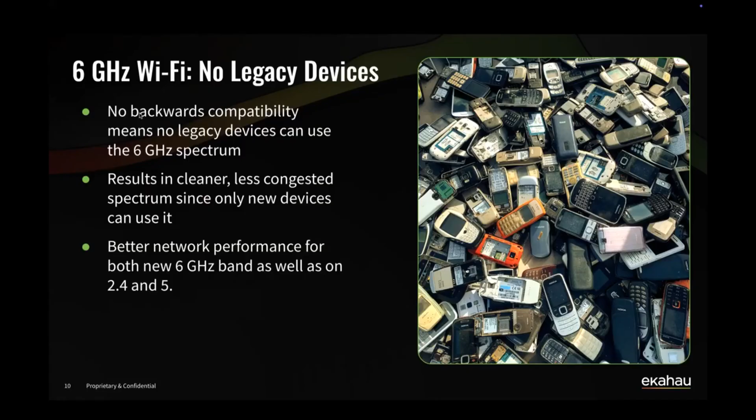When you look at enhanced security for 6 gigahertz, this comes into the design when you're looking at office spaces, stadiums, airports, or cruise ships, and understanding the complexity of this now. The majority of today's devices, your iPhones and Samsung phones, anything made in the last 5 years or so, is going to have at least some WPA3 compatibility in it.

Mostly from a software upgrade, but at least you can use WPA3 on 5 gigahertz, which gets you ready. But if you've got a 6 gigahertz device, you're going to be ready with that.

I'm not going to go into the transitioning aspect of it today, because we did a whole other webinar on that. It takes a bit more of a thought process, right? Because if you're going from 5 gigahertz to 6, think of it like the old days of going from WPA to WPA2. We had a challenge there, and now we're running into that same thing with WPA3 and 6 gigahertz.

So 6 gigahertz offers us enhanced open, better authentication, and of course OWE support, and WPA3, which gives us better management — management frames are mandatory, and the encryption level is a lot stronger. WPA2 is breakable today, WPA3 is less so. I'm sure about 10 years down the road, someone's going to have a supercomputer that'll be able to break that at some point.

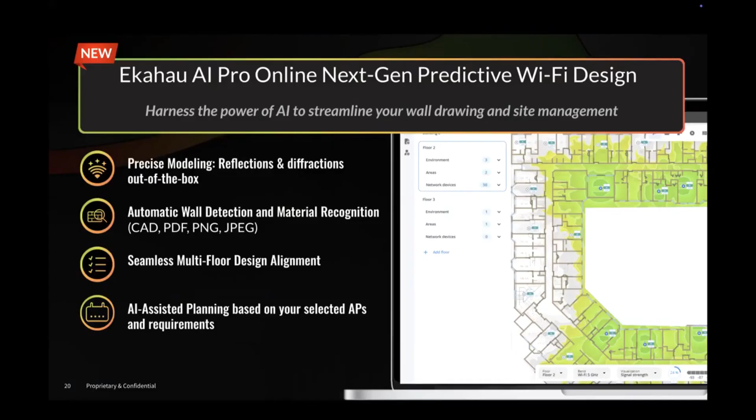All right, so let's get into some demos here. I'm going to pause for 2 seconds, and then go into demo mode and show you what it looks like from an accurate kind of design phase. What does that look like when we're designing? We have a couple of tools here, and I'm going to show you one of them, if I can get this over on the correct screen for you.

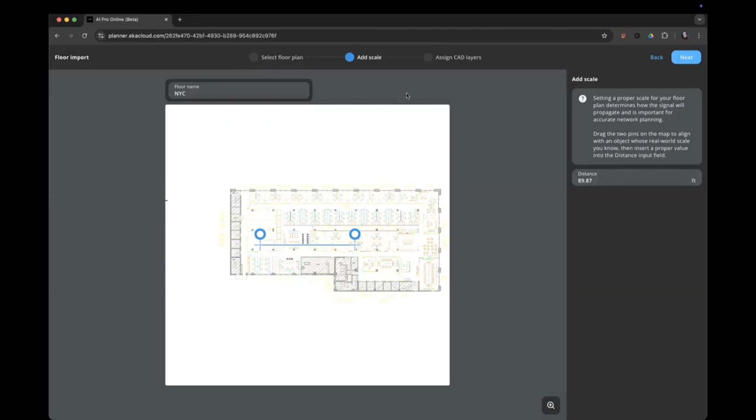In this case, I'm going to start a little more greenfield here. I'll talk about greenfield, and I'll talk about an existing design as well. From a floor plan perspective, what's cool is that we can grab any type of PNG, JPEG, or even an AutoCAD file. I like AutoCAD files because I can access the layers that are already embedded, so now I'm going to open up that CAD file.

It's going to assign the layers here. And once it assigns the layers, it's going to tell me, hey, okay, now you have this many types of walls, this is the attenuation of it, and this is where they are. Then you can go ahead and let that apply. So that's going to come up here in just a second. Of course, my password might have timed out since I left it open, but we'll see what's happening here.

Now we'll let that kick in. And I love it when the world of live demos works. Oh, there it is. Okay, I'm paying attention to the screen. Excellent, so here we go.

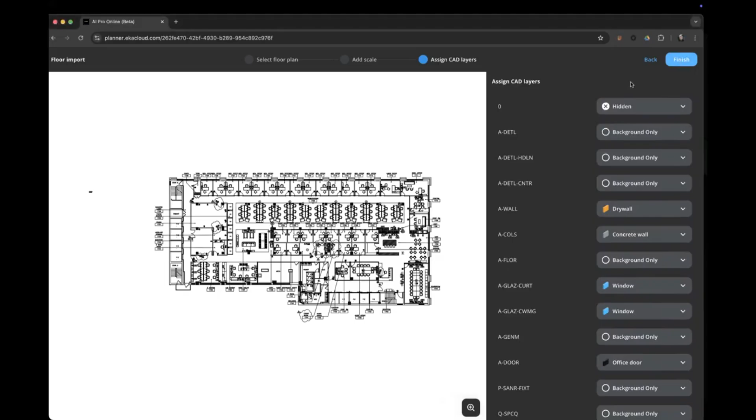All of the actual layers are in place here, so you're going to see all the things that the architects use. The architects use all these hidden, cryptic walls, and if you've read enough of these over the years, you can pretty much understand most of them. But what we've done is we're able to read them, and we've applied an algorithm to automatically start assigning it, so we know what most of the stuff is. Which is the cool part - I can go ahead and assign it, finish that, and it'll place all those walls in for me.

So now it's going to load that CAD drawing into a plan. What's cool about this is that we can go in and start designing it. We can design with any access point we like, and choose from the thousands of access points we've got available. Then we can get designing - we put in our requirements, how many devices we're going to be using here. I'll show you that in just a second, once this starts to draw out all the walls for us, and let's see if the magic happens just as fast as it should.

And I'm in the dev environment tonight because I'm showing you something pretty cool after this. So production is a little bit faster.

Excellent, so now it's going to ask me, did you want to add some more floors? No, I'm going to finish it. But if I did, it would be able to stack the floors for us. So now what we're going to see here is I've got a floor plan, it's all ready to go. It already drew the walls in for me, drew all the columns, and drew all the necessary things that I needed.

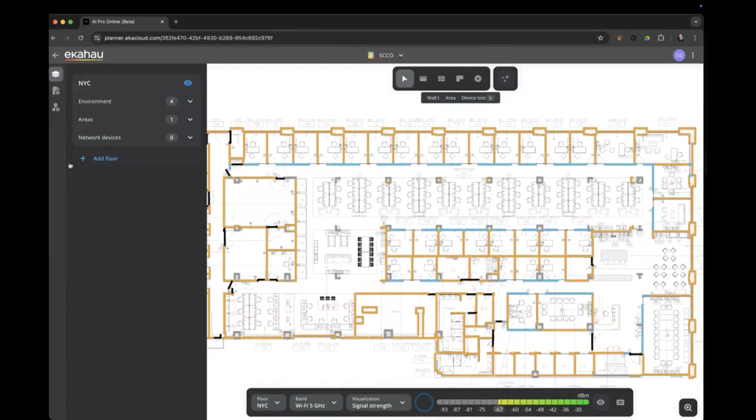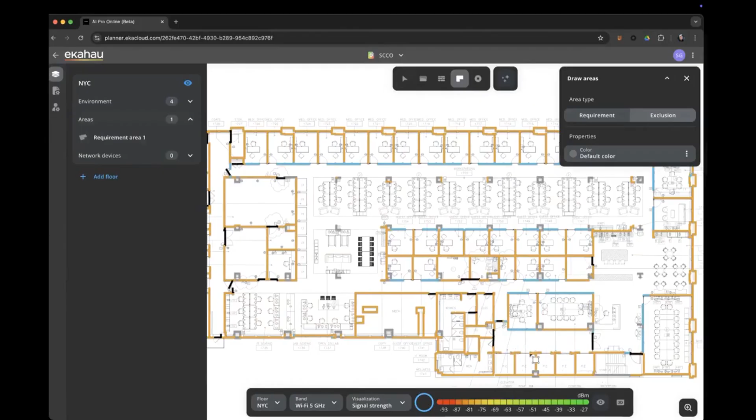Now it comes time - well, should we start placing some access points? Should we establish a requirements area? We should probably do that. So let's let it do a requirements area, and we'll probably put some exclusion zones in. Now before that, let's do the exclusion zones here. I'm not going to worry about the elevators in this case. Here we go, let's get back down in here.

And let's turn off the walls for a second. I think I'll put this back in here. Area tool. Come in, area. Maybe my mouse is not kicking in. Oh, there we go. Hang on. Okay, there we go.

So what I'm going to do here is that I don't need any of this, so I'll put this in exclusion. Good, oops, hang on. And put that back over there. And right click. Perfect, okay.

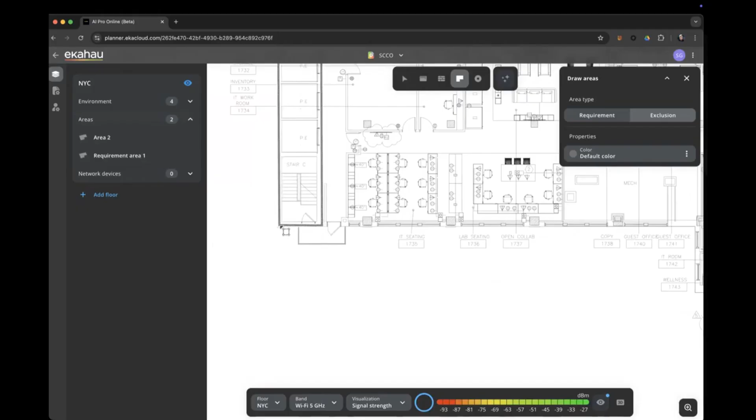So I got this area, and I know that I don't need this area here, so I'll just put that in place. And this is going to be, and I'll tell you why this is important in a second, because I don't need these specific spaces. The reason being is that I don't need to worry about access points in these areas, so I can save some time and money on that, and I'm not having to worry about that.

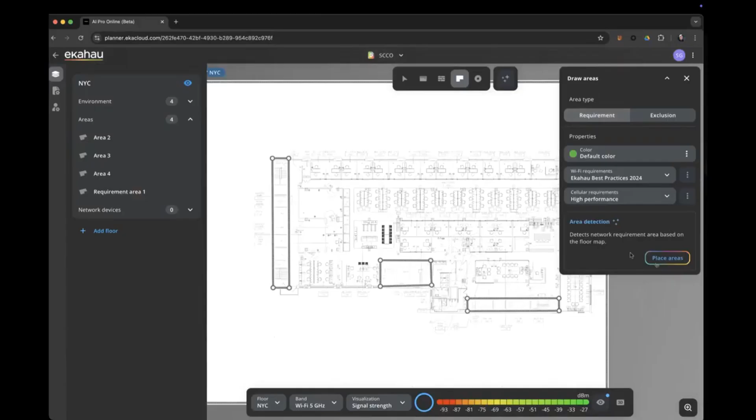So I just quickly draw that from my requirements area, I can automatically just place that area here. And I'm going to go ahead and do that. And it automatically did that in the drawing.

Now, the next part here is I can actually go into the placement of the APs as well. So in this case, I can go ahead and look at the placement of the access points. I'm going to now choose my Cisco access points.

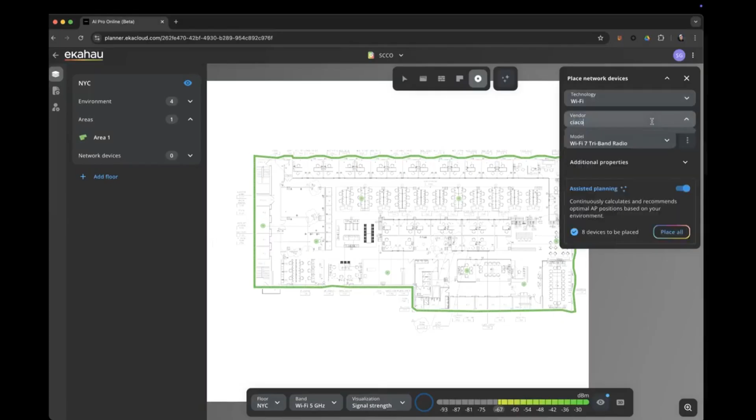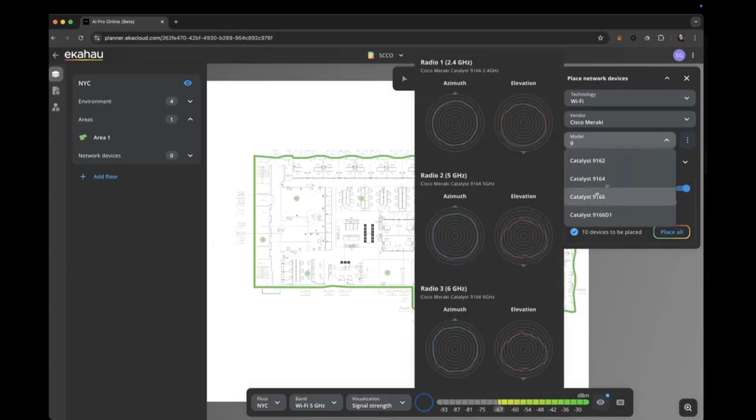And I'm going to say, I want to put in the 9166, or the, hang on, let's put in the 9167. Oh, are they not in this one? Oh, this is in the dev version. Yeah, so it's not in here. That's fine, so put in the 9166s in here. I can place that. Actually, hang on, I think I know why it's not in there.

There we go. And 9160... there we go, 9167 and 9168. No, they didn't actually put them in this one yet, but that's fine, that's not a problem. I'll just do this one here.

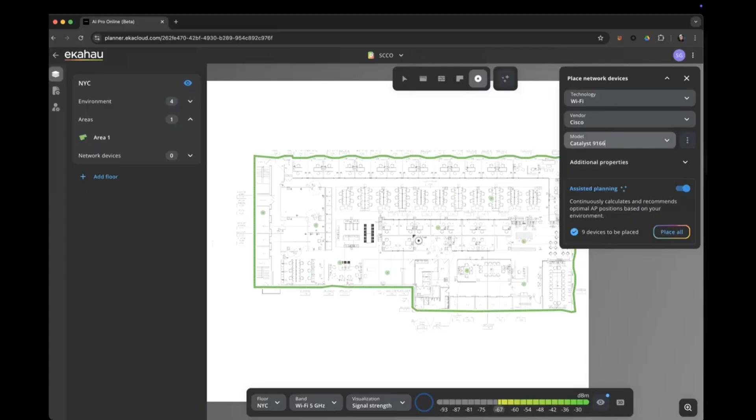That's fine, so I can go ahead and place those access points, but automatically you can see that the APs are being placed, right? And so from a placement perspective, I can let it plan, or I can actually go ahead and start planning it myself. So if I wanted to go ahead and start planning an AP, you can see that it already knows that the walls are there. And so then I'm going to go ahead and start planning access points for this particular map, right? And I'll just place some access points randomly in here, and I'll put them over here. And now you can see I've got a bunch of access points ready to go.

So for that, I've now planned out for my 2.4, 5 and my 6 gigahertz access points. And if I need to select these APs, I can see what the heat pattern is going to look like. So this is all from an online perspective. We're using the AI intelligence to automatically do that for us.

We can do it from an AI auto planner based on the requirements that we have and the height of the building, the floors. And then we can go into more of the environment. We can tell it, in the areas, what does that area mean? Like what's in that area? Is it a high performance? Is it just a medium or best effort, or is it a custom profile? We can actually put that in there.

And then it tells us how many APs we're going to need and if we're going to meet the requirements, right? For signal dominance, or we're going to look at it from a signal strength perspective. Maybe we want to look at SNR if we're going to meet those goals as well, right? We can do that.

Stu, real quick, we got a question. Yeah. How many dBm do you use for 6 gigahertz high density environments as default?

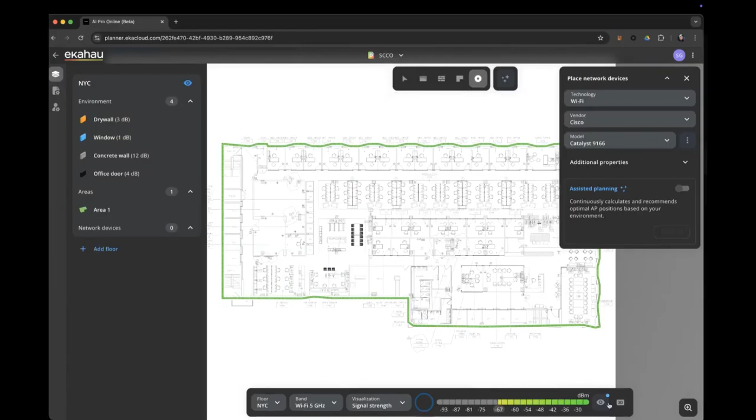So let's do it together, actually. That's no problem, let's do that. I'll get rid of those, and let's make sure we show it. I'll put the access point in this room and down right here, and I'll put an AP here.

And then if I want to add in the rest of those APs or do the assisted planning, I can now leave that AP there, and the other ones will actually pop up around it, calculating their positions based on this first one. I'll let that kick in.

I should probably use production tonight. Dev environments are usually less performant, but there were a couple of things I wanted to show you in here before I switch over to production.

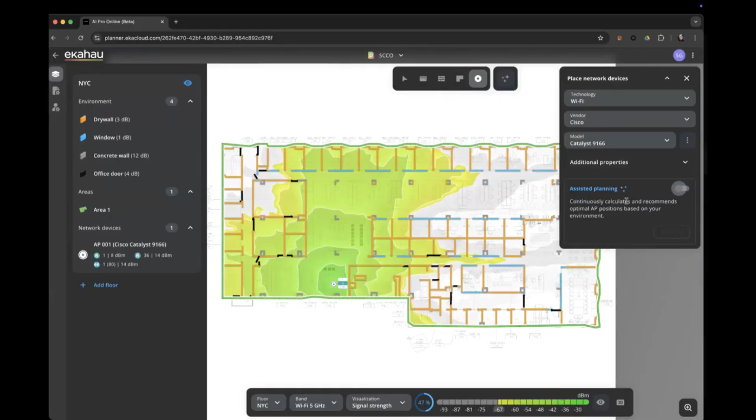Let's let it worry about it. Is it going to kick in? It'll kick in, but the answer is yes, it does do it if I wanted. I'll let it finish, but what I did want to show you was, once I place some access points in here, I'll go back.

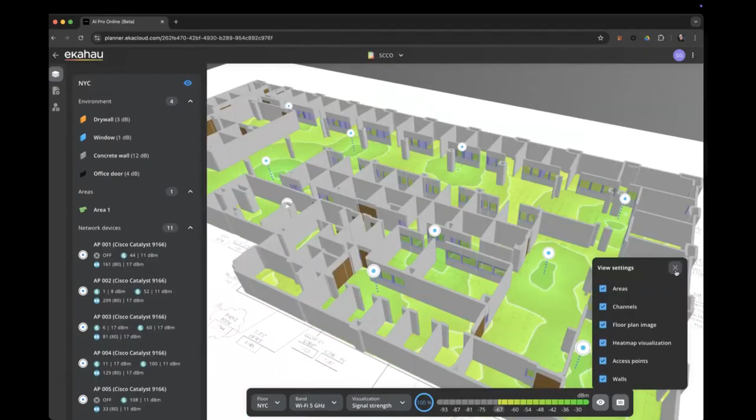There we go. I wanted to show you this piece here, which is kind of where we're going in the next phase: how can I look at this from a three-dimensional floor plan, showing the walls aspect. So our next release is thinking, now that it's cool we can see the three-dimensional view, we also want to know how we can do that.

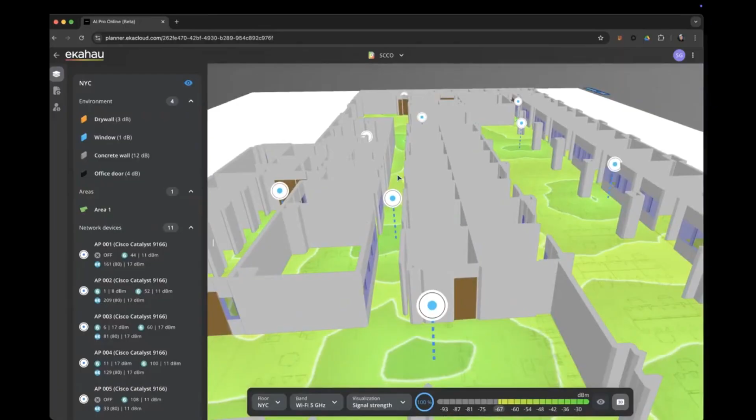Kind of the Minecraft walk, right? Or I guess you could say the Castle Wolfenstein walk—probably some of us remember that. Yes, you can kind of do that walkthrough here.

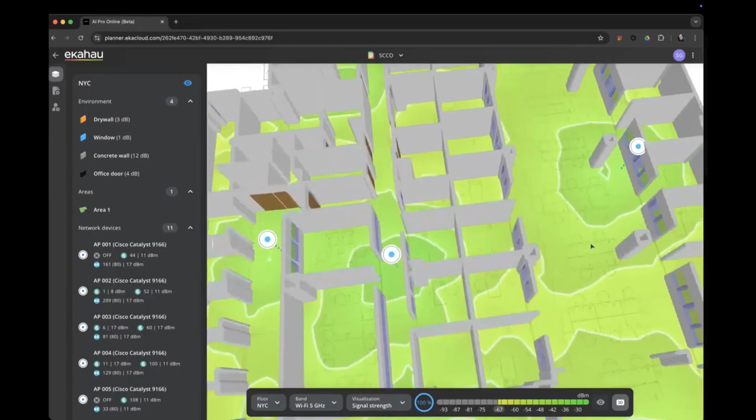The next part is how can we actually see how the RF actually broadcasts from the top down. That's our next phase: showing what it looks like from the top. We can see how it looks on the map, but wouldn't it be cool to see it the way it's coming from the access point itself, and how it's actually projecting down along here rather than just seeing it on the floor. So those are some things we're working on next.

But this gives us a good idea of how this office environment—and this does exist, I've been here, this is actually one of our offices—and we've actually let the AI design this office, believe it or not. It actually works just fine. The AI designed the APs, put them in place based on all the materials and the exclusion areas, and we got ourselves a good design that looks pretty much close to this. I placed it here, but I know the AI designed it pretty much close to this.

Now, that is from a perspective of the AI online design. The next part of it is I wanted to show you a little bit. Next part is how do we look at data from the cloud?

Let's say if we have an actual environment. So one of the things that we can do, as I'm going to show you here, is what does it look like? We'll get you in the next screen here, and I think we're doing okay for time. We'll go to this one here and show you that one. Da-da. There. Oh, good. I actually have it right here. Perfect. Okay, so let's get another screen in here.

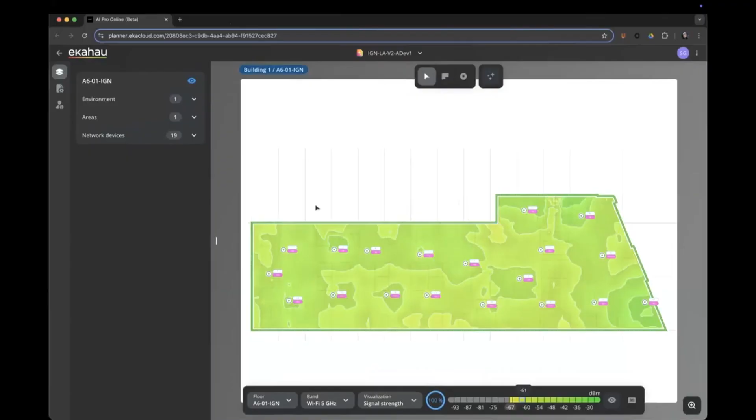This is actually another environment where we looked at from a design perspective. But this piece here is what it is from an actual survey, right? How does it look like? What does the data look like from a survey perspective?

Well, I can look at that from kind of the APs themselves and how they were detected. I've got some Cisco Meraki access points here based on a survey, and I can see exactly what those access points are doing. So I know we have APs on channel 11 and 6 and 48. Obviously, we have some things we need to fix in there from a radio perspective, but that's okay.

But the point of this demo here is to show you that what if we were to increase coverage in certain areas, or we were to move an access point? What would that look like? Now, in the old days, what we would have to do is do a survey and then do a redesign and place new APs in those same areas. Well, you don't have to do that now.

So this is all survey data. I can actually now move this access point right now, and I can say, I need it in this room. And so now we automatically know what the actual environment's going to do here. So I push it over here, and I can push it over there. And the effect is now showing that because we already calculated the walls based on the survey from the Sidekick 2, it automatically knows how that AP is going to behave. And I don't even need to physically move it.

Now, this is a super cool feature, and it's super time saving, in my opinion, because if you think about all the times when you have to go out and troubleshoot, or you're looking to redesign access points—well, what if we just move it over here? Is that going to fix the problem?

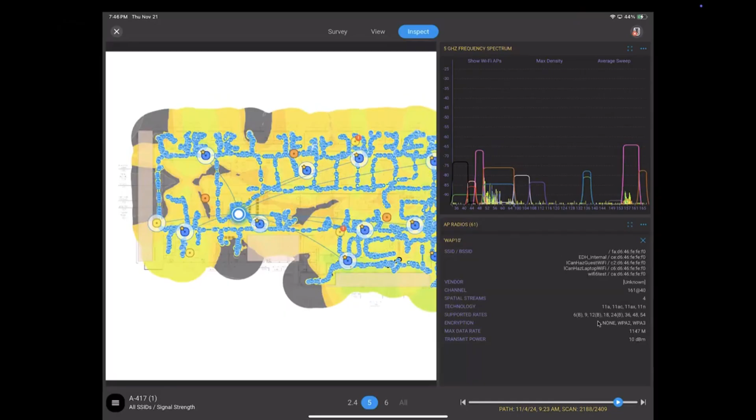So if you don't need the mesh, just get rid of it, because if you already have a network set up, you don't need the mesh. It's a feature you can turn off in your network general settings on the dashboard, and that can be extremely helpful for fixing the performance of your network as well. So finding these things, the Sidekick finds, is a huge time saver.

Now, looking at the data aspect, I can see not only from the access point, but I can look at the combined waterfall, because I may end up having to find if there's drops in the performance. Maybe I've got some dropouts, and maybe there's going to be some red showing on the bottom here that'll say, yeah, you dropped out, but you actually are okay. Your pings are all good, you're roaming just fine, right?

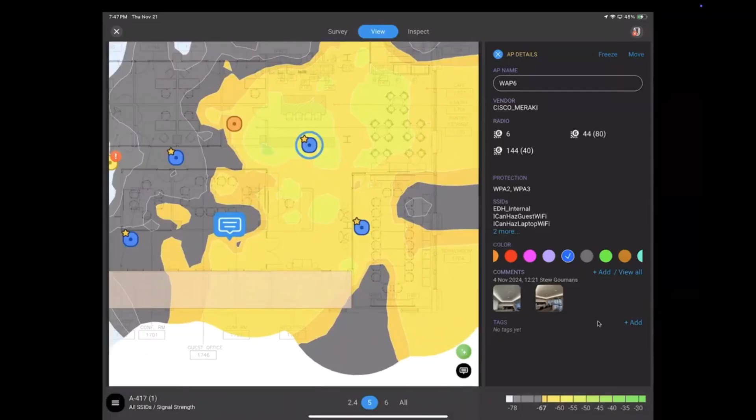I'm even going to be able to find things from the validation survey, like what is the heat pattern of that access point, right? What does it look like? Is it doing the right thing? You're looking like, wow, how is it not working in that room, right? Well, it just so happens that in this room there's actually some columns that you don't see that are there, that are actually creating a shadow effect where that access point broadcasting in that room is not good. So hence an AP was put in there. And the AI put that AP in there, believe it or not, which was really cool.

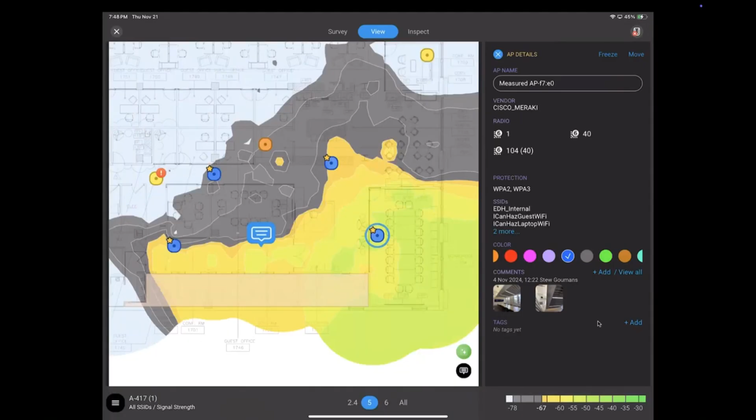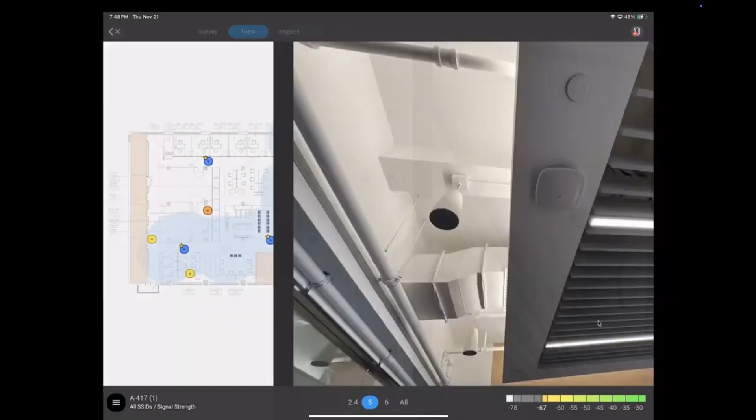You can see that, which is nice about when you do a validation survey: document, document, document. That's one thing we all forget to do, documenting our network, because we love documentation, right? Everybody loves documentation. Document your network and always take pictures. You can see I've got a picture of the access point here, right, that I can go and see. And then I've got another one, a close-up of it, so I've got that ready to go, and I've got some documentation there.

And the same, if I'm going to find something that shouldn't be there, like, oh, what's this? This is the latest kind of little interference guys here. These actually are from Lutron, and they control lighting.

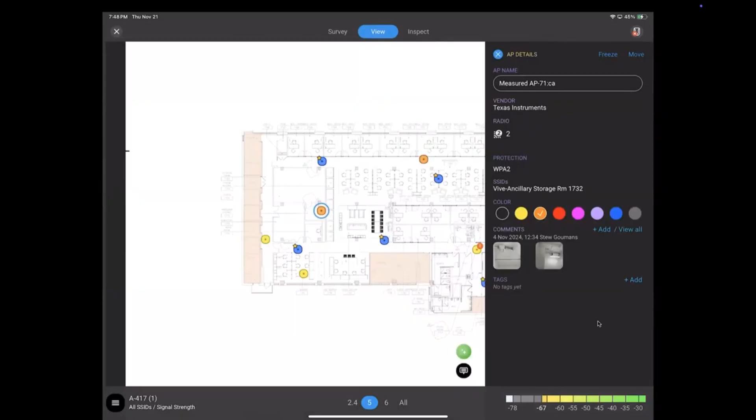So what they do is they have a wireless sensor that goes back to a pad, and you can control the lighting from there. Well, it's a great thing.

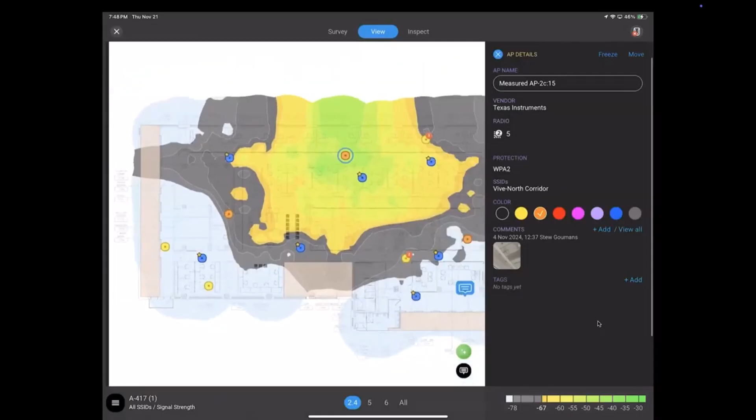But what nobody told anybody is that they didn't really fall into the right planning of wireless. They're on channel 2 in 2.4, and they created SSIDs for each individual. Well, this is more of just like, okay, we need to kind of fix this up. But the good thing is that we're not using 2.4 in this environment. We're using 5 and 6 only, so that's okay. But it was nice to know that there were things in the environment that could cause something later down the road if we needed to open up 2.4 for something.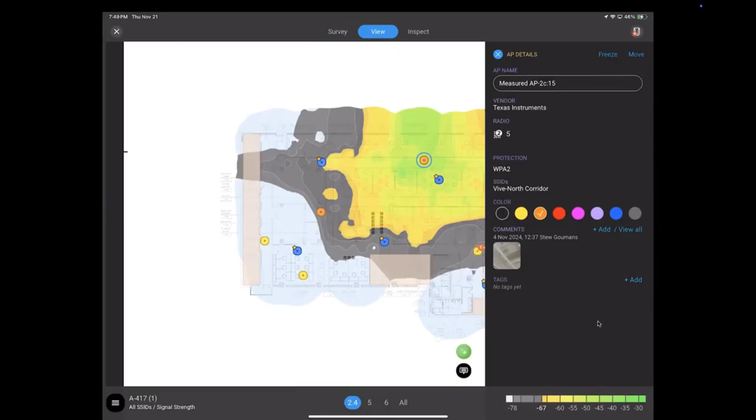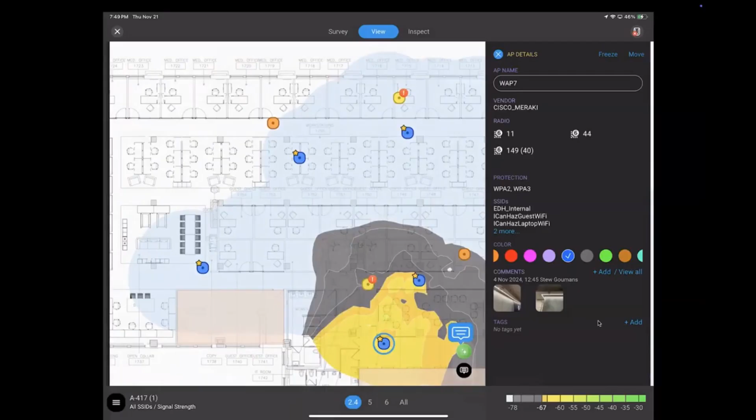And of course, you're going to find your other folks broadcasting in here, and using colors and labeling things when you're surveying is extremely important, because this allows you to classify things that you need to go look at later. Maybe like this, I had a printer actually over here that'll show up later on another survey.

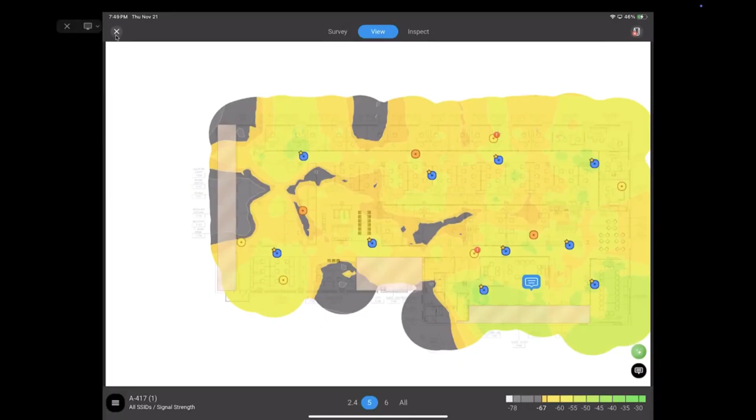So this validation was great, but then I had another survey a little bit later that would show the validation of the access points being in, had a printer that showed up. And that printer was actually showing up and causing a bit of a disturbance, right? And you say, okay, well, let's go see what that one was doing.

And I will go back to this one here, and we'll open that up in a second. Oh, I don't need to synchronize that one. Let's go into that one. Perfect. Open it up. Perfect. And now you can see I've marked another AP here on another survey as I had a LaserJet printer. So these are things that prop up afterwards.

So you think you may have seen it now, and then the dashboard shows that there's something else, and like, well, where's that? So then now you can go and track it down. And that's when you can open up the analyzer software and go in and do a deeper dive of that as well.

So those are some of the things that you can do from a survey perspective. And yes, you can survey in buildings, parks with GPS. You can do all that cool fun stuff as well.

All right. Now, just to kind of get back on track here from a perspective, I know, so from a timing perspective, let's make sure I got my window here, the right window. There we go. Oh, excellent. Let's put that up. Here we go.

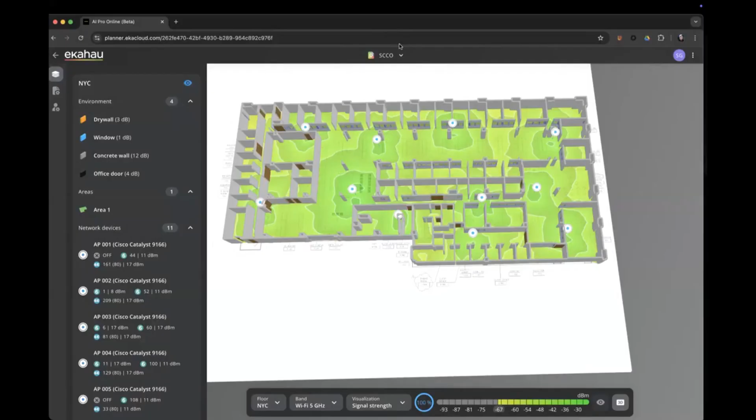Okay, so some of the access points, obviously, that we can actually design for. There's over 5,000 different types of access points. Here's to name a few that are in there already. Of course, we can design for different antennas and whatnot as well, and we can help you with that.

All right, now talking about from a provisioning a dashboard perspective. So when we do from a dashboard perspective, one of the things that we want to do is make sure that if we're going into doing a dashboard, what we want to do is understand how do I make this thing easy. Well, one of the things we're going to do is get our floor plan.

We're going to go out and do a survey with our sidekick and grab the data. Well, automatically when I grab that data, one of the things that's going to happen is that I'm going to go out for a walk and understand where my APs are planted.

So in that case, we had some Meraki access points already placed on the map. And well, we didn't have that map inside the dashboard at all. So the cool thing we can do is, well, we're going to go do a survey. We've created our documentation. We know where the access points are. We've added some pictures to that as well. And now we're going to take that over to the dashboard.

One of the things we can do is take our project file that we've already saved on our dashboard in the Ekahau cloud, Insights, and provision it through two different places: through DNA Center, or Catalyst Center, and the Meraki dashboard.

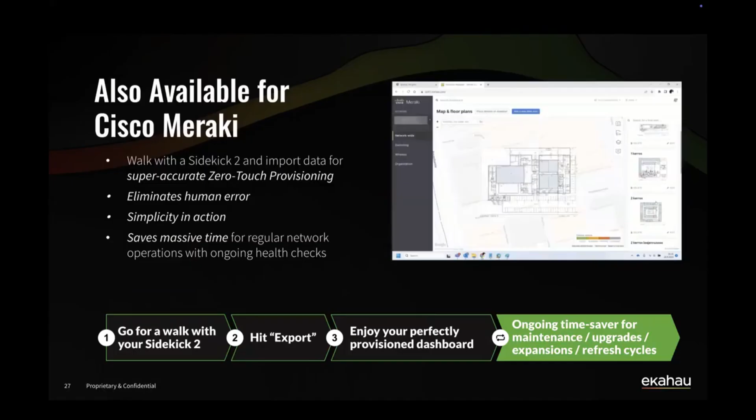Now you can see it provisioning the map, but in the background there's going to be a two-way sync. So we've sent off the data to the Meraki cloud, that's been placed, and we get back the serial numbers and names of those APs. If we didn't know the names ahead of time, we'll know them now, and they'll be synchronized to our dashboard and in our project file.

If you wanted to try this out yourself, there's a Cisco dCloud demo. Most of you are probably familiar with dCloud, but it's a great place to do some lab setups of script environments, and Ekahau is now inside Cisco dCloud for you to check out.

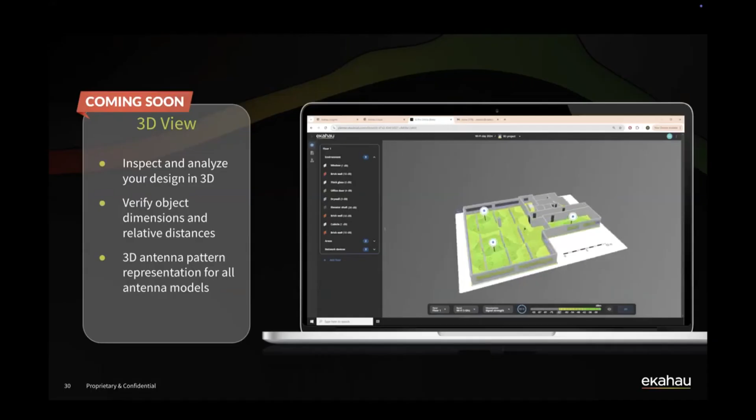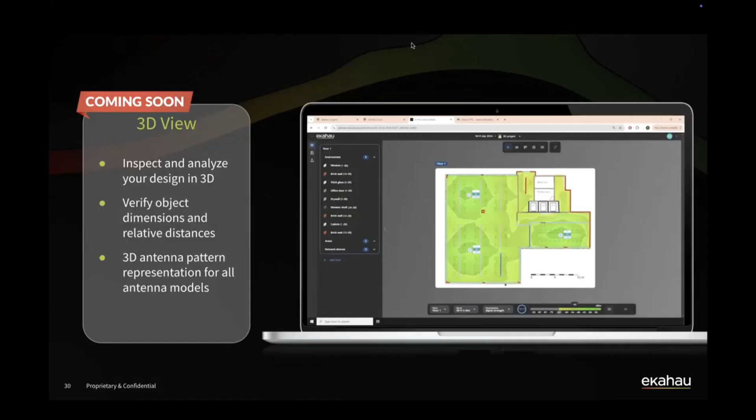And of course I talked about the 3D viewing perspective, which is coming soon. But before I get to that, there's one more thing - let me get my screen up here - we're going to talk about a couple different ways we can approach things from a survey perspective.

From a survey perspective, one of the cool things we can do is a Just Go survey. This requires that if you want to do a survey where you don't have an actual floor plan, you can use the LiDAR built into your phone and actually create those floor plans on the fly.

So you're saying, okay, that's kind of cool, Stu - how the heck does that work? Well, I've got a demo to show you right now. As you can see, we're going to open up the phone with the survey app, get started, and it starts capturing the walls.

As you walk around, it starts drawing the floor plan. What's really cool is that floor plan gets drawn out and starts taking shape. It doesn't collect people, places, or things - just the walls and solid surfaces. Once it goes through all those solid surfaces, it creates the floor plan while also collecting the access point locations, their channels, and all the spec behind it. Then you're left with a sketch generated as Just Go.

So that's what it would look like as a Just Go. This is our first gen - our second gen goes beyond this, coming in January. Instead of worrying about finding the floor plan quickly when I have to resolve an issue, I can just go out and survey it quickly. I don't really need a floor plan because I don't have one in place, but I need to quickly resolve what's happening - this is where you can use Just Go to do that.

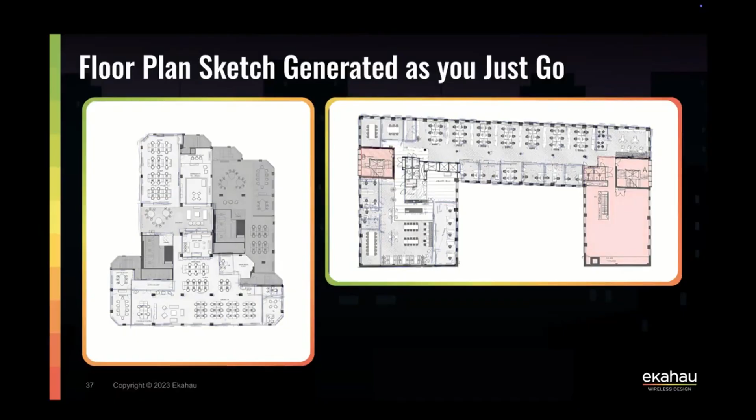From an autopilot to Just Go, this is kind of a side-by-side comparison. Autopilot is something we released a couple years ago, where we're using the AR kit portion of the Apple iPhones to understand how we can walk around without clicking all the time like we used to do. So there's kind of a side-by-side of where the access points were placed, and the Just Go is a very viable solution for capturing some data on the fly.

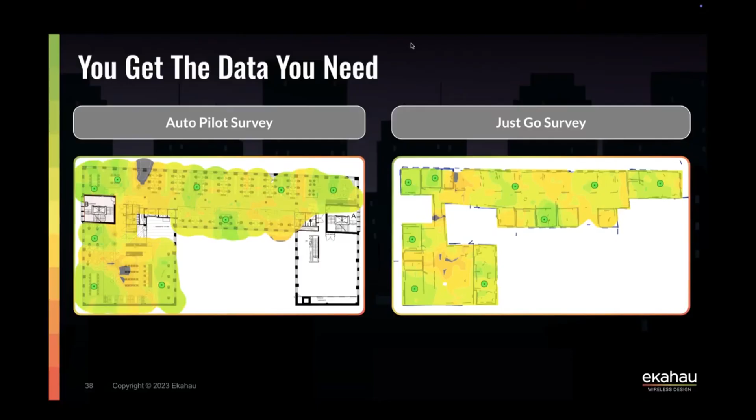So if you're looking at this from a survey perspective, you've gone out, you've surveyed something, now you need to figure out what's going on - tracking something down, or maybe I need to look at the spectrum. One of the other things you could do is actually run a speed test. With a speed test app that's integrated now, we can go and test from a data perspective. We're going to be testing a video as well, and you can see that live on the spec.

So that's a new toolset we've enabled within the Ookla realm of analyzer. You're going to be seeing the speed test, and also we're going to be looking at a couple cool things like down detector integration that you'll see coming shortly. And yes, we do packet capture as well - so if you're a PCAP fan, that's another cool feature we have embedded.

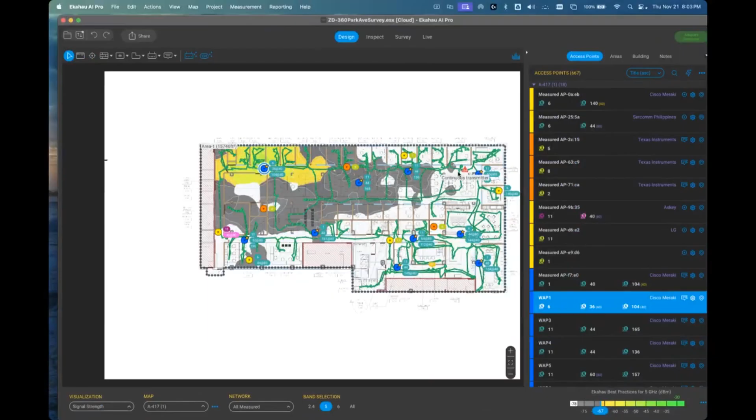It's cutting through as well. Let me see if I might even have... no, I don't have that handy off the top of my head to show you. But if you were to kind of go and look at that and find it, you would definitely be able to see that. But I can show you one piece of interference, which was actually really cool, was that this new office that we were building here, it actually had a transmitter detected within this realm.

And when I get into kind of understanding why empirical data matters, I like to kind of go back and look at it from the interference section, right? So from an interference standpoint, I want to know what the footprint is and what the zone of impact is. So when I take that sidekick out and I know that there's a zone of impact on this particular area, this is something that causes concern.

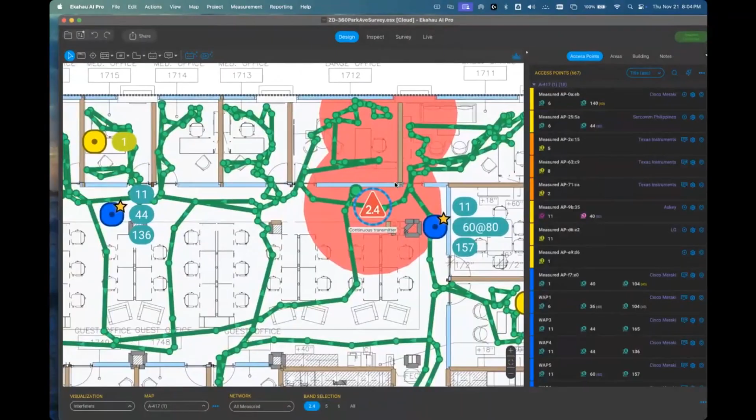Now, there's a minimal zone of impact on there, but I could trace this coming from across the street from another building. And this particular area here from an interference perspective, I'll just go back here and look at it from the spec-an. As I can actually see, while I'm going through here, I will definitely be able to find out where the strongest part of that spec-an is.

And so then I can actually go ahead and break it out into a new window so we can see this and have some fun here. We can actually break it out and look a little bit deeper if we needed to find out if it's really something that's bothering us or not. Now, in this case, it was a little bit bothering us because I was getting variable ping times, right?

So was this a 2.4 issue? Was I connected to 2.4? Actually, yes, I was, strangely enough, when I did this particular survey. So I wanted to see what's going on here. Now, I didn't get kicked off as much as I could visually see, but it was something that in this area caused a little bit of disturbance for me. But it was good to know that there was something here, because in the past, in our corporate offices, we found 5 gigahertz interference continuous transmitters coming from the most unlikely places like compressors or old refrigerators that were causing an issue there.

All right, now from a tricorder perspective, I think what I can do here is engage my... oh, did I unplug the wrong one? Yes, I did. I unplugged the wrong input there. No problem.

So we're going to show you two things here. I'm just going to plug my sidekick back in and make sure that my audio is working the way it should be here. Perfect. My audio might have kicked out there.

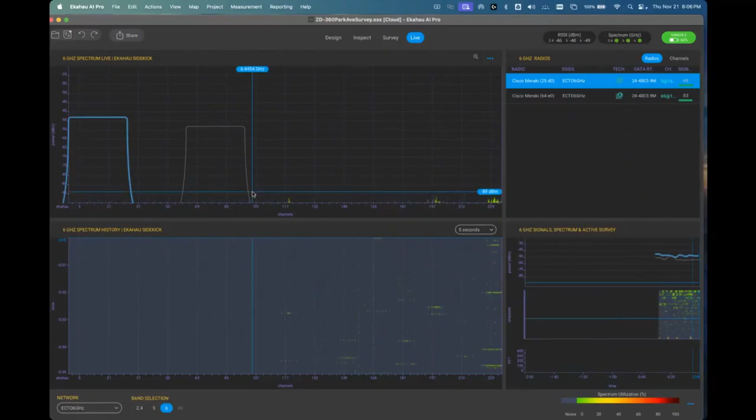That's fine. Okay, so now what we're looking at, this is actually live. So what you're seeing here is actually what's in my actual place. So you've got a bunch of different SSIDs here, right? I can look at just mine or everybody else's. So if I wanted to look at Ecto 6, I can see that I've got 6 gigahertz running on channels 5 and 69, and that's running just humming along just fine. And I can see 5 gigahertz, it's a little bit busy. These are mostly probably the kids running stuff at the moment, that's probably what's happening here. And I've got one of my older access points out in the field, an old Wi-Fi 5, so that's actually important.

If you're looking at access points, we'll be able to show you the tech version of it. This helps you identify access points in the field that are older and you may have overlooked, because when you get into hundreds and hundreds of them when doing surveys, you kind of just tend to go, oh yeah, I don't know where that is, right? And the great thing is that we map them out for you, from the map. So we'll be able to tell you exactly where they are on the map as well.

So this is actually kind of a live perspective of what we can see from 2.4, 5, and 6 gigahertz. And I like to actually watch in here, I'm kind of a newer geek when it comes to looking at these cool things. I can go down to one second time intervals, and you can actually see how it's separated in between, right? It's how Wi-Fi is actually working. So whether the device is transmitting back and forth to the access point, you can see that there, and you can see some data pushing out pretty good right now.

As it gets red or gets solid, you can see how that's kicking out. No interference here tonight, but I do live close to a border where I get lots of interference from 5 gigahertz quite a bit, and it's usually in this realm. Look at that right here. Looks like we are going to see something kind of fun. Look at that, so if you look at this guy right here in channel 1, there's a bit of a finger right there, and that's most likely going to be a wireless camera.

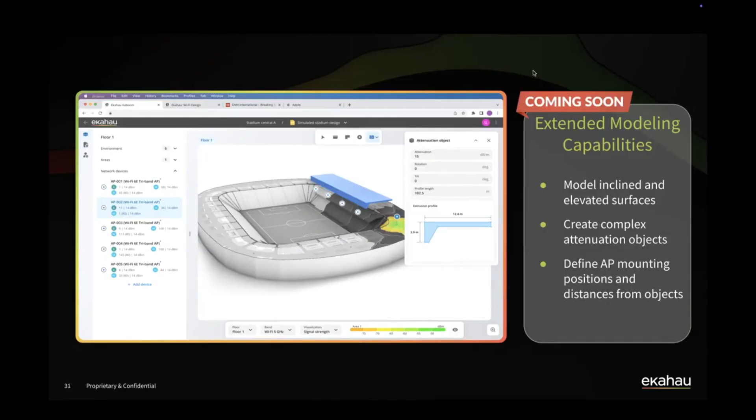There we go. Okay, here's one last thing I can leave you with. One of the cool things we're doing from a design perspective is inclined surfaces and extended modeling capabilities. What's really cool is that we're also looking into doing more from a stadium perspective.

This is something I love too, supporting BIM files, which is looking at 3-dimensional spaces, which a lot of architects use now, putting on 3D goggles and walking through the space. But from us, we're going to take those BIM files to the next level and actually create that 3-dimensional space.

Then we can give you a much clearer indication of how that Wi-Fi is actually propagating, so we can design it a lot better. Inclined surfaces has always been the holy grail to make sure you can actually do that, and this is something we've been able to achieve.

This particular feature is coming in the first quarter of next year, so stay tuned. This is a cool feature we're doing - I can't wait to use it, especially working on larger buildings and cruise ships. This is going to be super cool, and we're going to work with a customer to test that out. It's a fun time to be in the wireless realm doing this stuff.